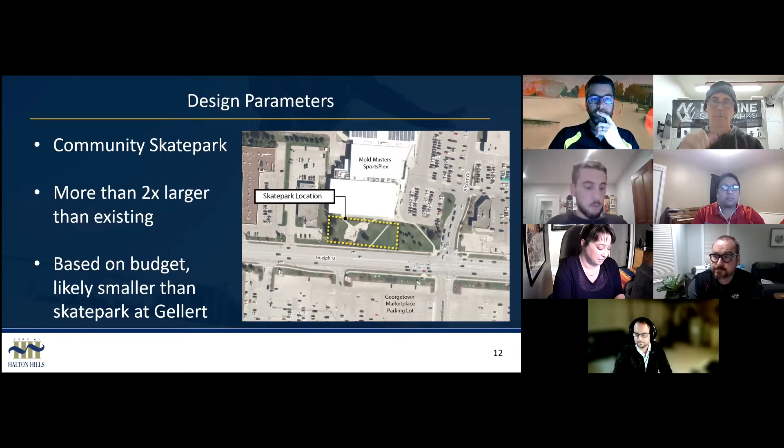So if we jump right in from there into the options, we'll be able to explain these a little bit further. The first thing you'll notice as we go through this presentation is that all three options take on very different forms and offer different terrain features.

We really wanted to use this meeting as an opportunity to spark discussion, and have you provide feedback on all of these design directions so that we can really dial it in and come up with the best option for your next skate park. With this first option, we're considering this our flow bowl street plaza option. This option is a pretty good 50-50 split of those two terrain types.

So if we start with A, and if we go to the next slide where we have our visual aids, our inspiration and precedent, we can talk about it through this. If we look at A, we have that represented as a shade structure. We understand that these facilities are pretty active and tiring—it's a tiring sport—so having an opportunity for seating and shade is obviously quite important. But the main purpose is obviously the terrain for us.

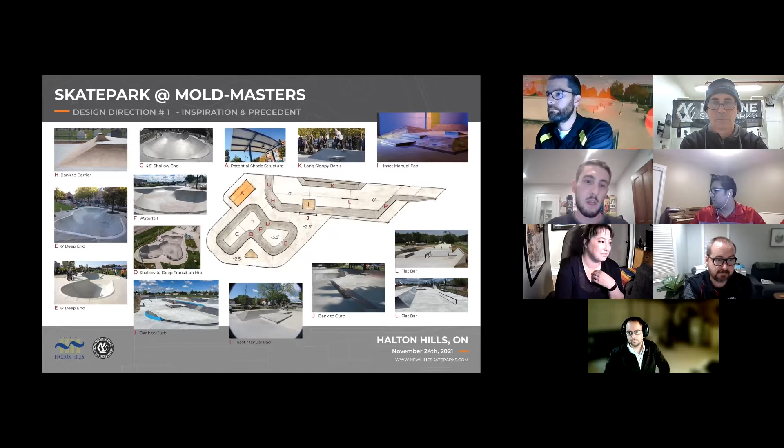C is representing the shallow end of the bowl, which is a back and forth mini ramp, which then feeds you into the hips represented by D. Those are high-low hips from shallow to deep—one's a 90 hip, one's a 45 hip, offering different feels on both hips.

From there, F is a waterfall that brings you from the shallow end to the deep end. Our deep end, 6 feet deep, represented by E, is basically just a double pocketed deep end with a large radius wall that you would be able to stall or launch off of coming down from the waterfall. From there, we move into the street portion of the design.

So in this option, we are able to create a consistent bank profile that runs along the entire length of the facility. That allowed us to build that grade up for the bowl and really maximize the depth of that bowl feature. Along the entire southern edge of the street course, we have a 2.5 foot tall bank. G wraps around, continuing that bank profile, and M blends into a transition profile.

That offers that little bit of difference between bank profile and transition profile, so that you can get a sense of rolling over coping as well as just rolling down a bank.

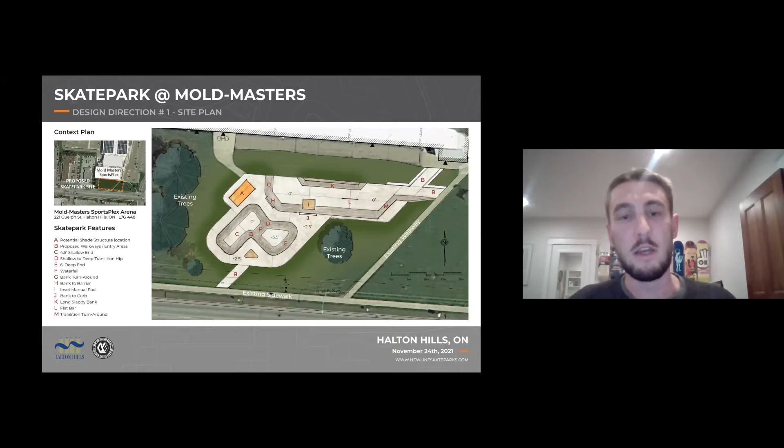So this option gives us everything that you would need as far as basic street elements. You've got your flat ledge, your flat bar, your manual pad, bank to curb, bank to barrier, and a long slappy bank. So that's option one, our flow bowl street option.

This is option two. Again, different form. I see a fish when I look at this option, but this is our more expansive flow bowl option, where we've prioritized the bowl terrain and we've deprioritized the street terrain.

In this option, you'll notice that we have grades varying from 0 to 0.5 on the main deck slab around the bowl. With that, it allows full accessibility around the entire design, and just clean riding throughout.

What a compromise to that is it does restrict the depth that we have for the bowl. So in this option, we relied upon extensions to build up that depth. The main portions of this bowl are 4 feet deep, with 2 foot tall extensions building up to that 6 foot height.

So in both of these first two options, we're really hoping to get that 4 to 6 foot depth range, just as a complement to what currently exists in Gellert and in Acton, where we have the pool bowl, the mini bowl, and then the Acton flow bowl.

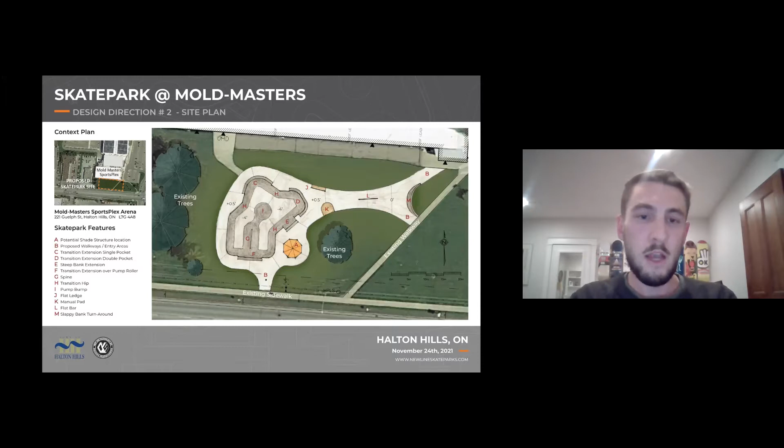So with this option, if we look at the bowl specifically, it's pretty expansive, lots of options, multiple hips, multiple pockets. If we start at the bottom, we have an extension over a roller. I guess if we want to look at the next sheet, that might help to visualize some of these features.

F is represented throughout this board. I think primarily we've identified it - it can be seen in that photo on the bottom left, as well as the photo at the top left.

So basically an extension with a roller bump that breaks the grade, and then that feeds into G, which is a spine. With that spine moving around into I, we have the spine blend down into a half pump bump, and then a pump roller feeding into a full pump bump that's within the middle of the bowl, offering tons of potential redirection opportunities, flow opportunities, speed generators, speed controllers, all throughout that feature set.

From there, we have H, which represents our 3 hips, all of which are at the same elevation, but all offering slightly different angles. Some slightly mellower than others, offering that progression.

Moving from that, we have feature C, which is our single pocket transition extension. That then feeds into D, which is our transition extension double pocket. So again, building that up, allowing for that height to exist not only in 1 pocket, but 2. You'll be able to stay high through those pockets before feeding you into the hips.

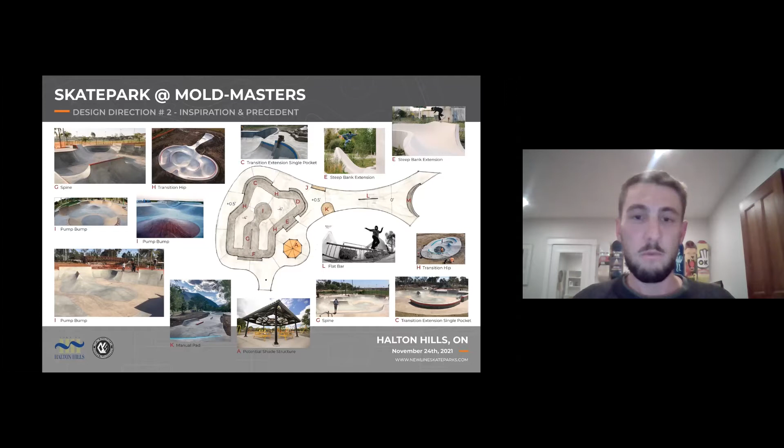I was going to say, Stefan, there could be a roll-in opportunity between D and E. Possible. Yeah, certainly. Yeah, so that's option 2.

I guess we'll move into option 3. So again, different form, slight departure from our previous 2 options. This is one option that doesn't include an enclosed bowl. Instead, it includes a spined mini ramp. So this is our obstacle street mini ramp option, basically.

So first option was 50-50 split flow bowl street. Second option, expansive flow bowl, simple street course, 80-20. This is our obstacle street mini ramp spine option. I would probably go 60-40 obstacle terrain and transition mini ramp terrain.

So with this option, we really wanted to create that V shape, really utilize the space that we had, create that length required to get those multiple hit features on the obstacle street side of the park. So I guess in this option, we'll start with that, and then we'll move to the mini ramp.

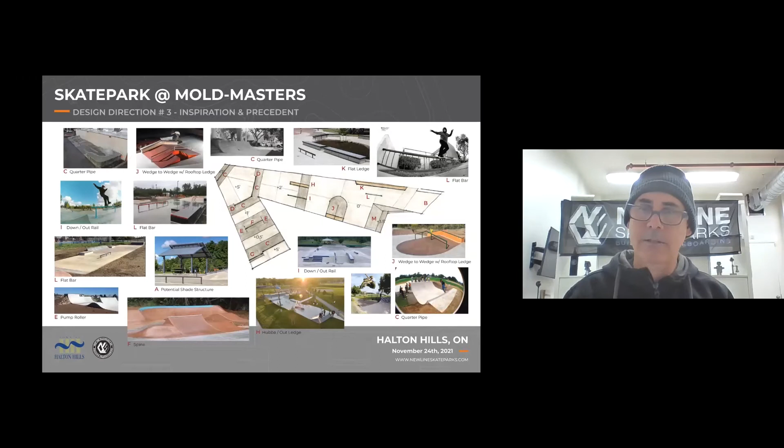I don't know if, I guess Mark, we'll stay, sorry. Mark, if you flip to the next slide, there's a good photograph of what that whole complex looks like. Yeah, for sure. Yeah, so that's represented by photo E on the bottom left there.

Pretty similar feature there, and then also the spine in image F at the bottom as well. But yeah, this option is a slightly different idea.

It draws upon that obstacle street terrain idea, an open transition space versus an enclosed bowl. Going back to the top screen, I want to touch on that third entry. We have the two entries on the top right, but in this option, because of the nature of the mini ramp, we have a pretty interesting opportunity to enter the space.

Coming off of Guelph Street, you're returned back, and then you have two approaches into the park. That was kind of where we envisioned, if we were to put a shade structure, that would be a good location for it, down at that lowest elevation, looking into that mini ramp spine feature.

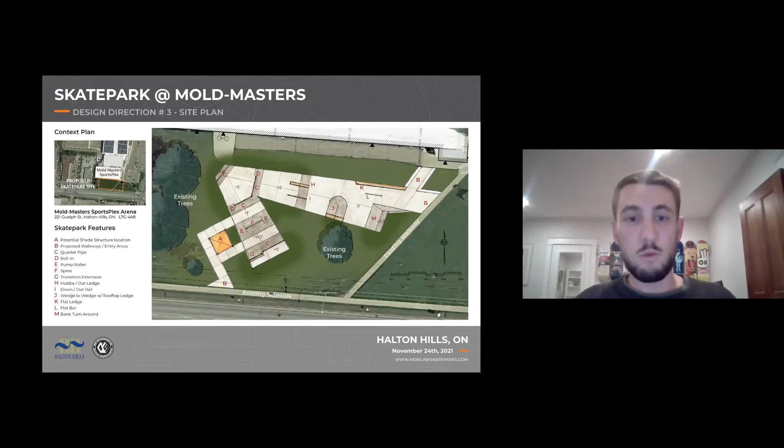If we go to the next slide, it'll give an opportunity to get a sense of some of these features, a pretty good representation of them. A lot of obstacle street terrain features you'll likely be familiar with from Gellert and Acton. They're great for generating speed and for learning different tricks on, and they're represented well by those support images here. Just a different feel, different style terrain.

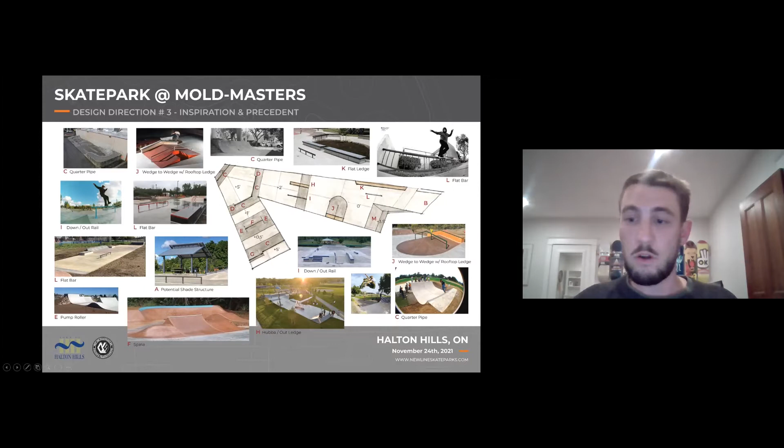We really want to spark that discussion, so we wanted to provide three different options, three different forms, really get a sense of where all of your heads are at and what you want to see in this next park. And with that, I think we're in a good place to move into the breakout rooms.

If the schedule and agenda allows. Yeah, no, thank you very much, Stefan.

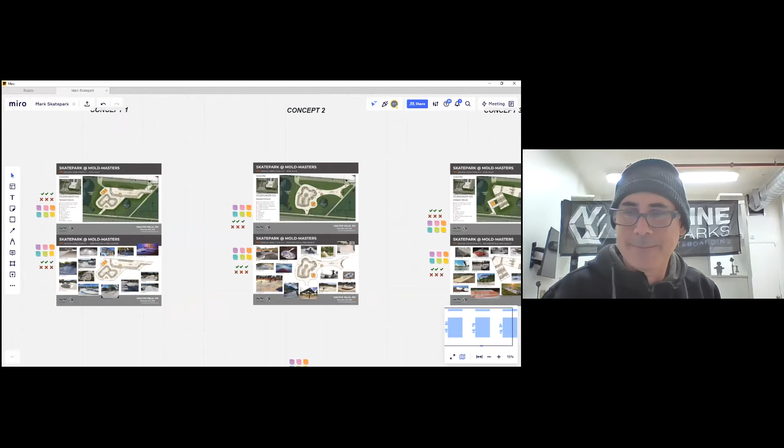Okay, hi Bill, I'll say hello. Oh, there's Justin, okay good. Sorry, my name's Justin, I live in Erin. This is looking pretty sweet, I'm enjoying it. Awesome, welcome Justin. Myself and Mark, hey Bill, okay. It's Warren. Oh hi Warren, there's a familiar face, a face from the past. How are you? Well thanks. Welcome to the breakout room. Good to see you, Mayor Bonnette. I can see, or I guess Meg was facilitating, but maybe she jumped somewhere else.

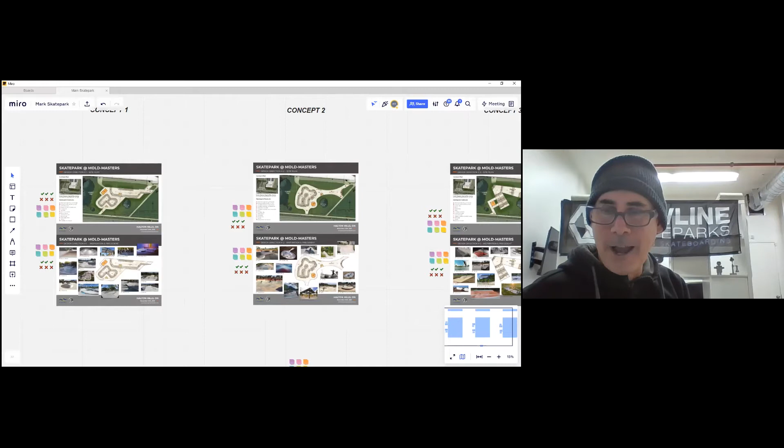So Justin, I'm going to assume you are a quote unquote active park user. Are you a skateboarder and or BMX rider and or scooter rider, or any of the above? Yeah, I'm a skateboarder, but just so you know, there's probably like 20 people in here. Just because you said you couldn't see, there's 15 people in here, or I think there's 17. I had trouble unmuting myself, Mayor Bonnette. So again, welcome everybody in this chat room, but I see participants are 17.

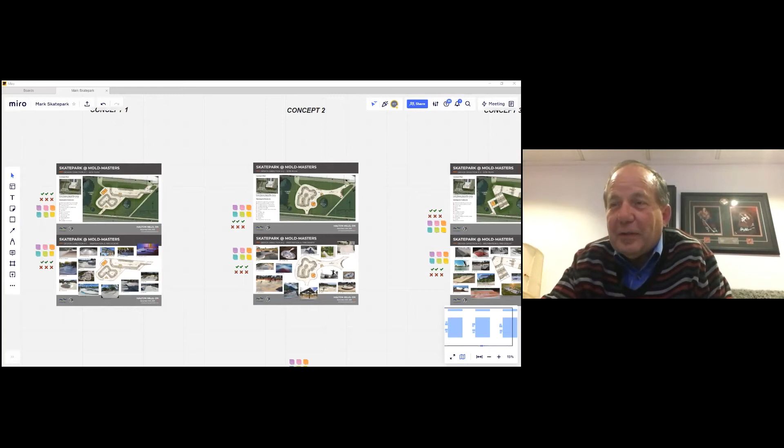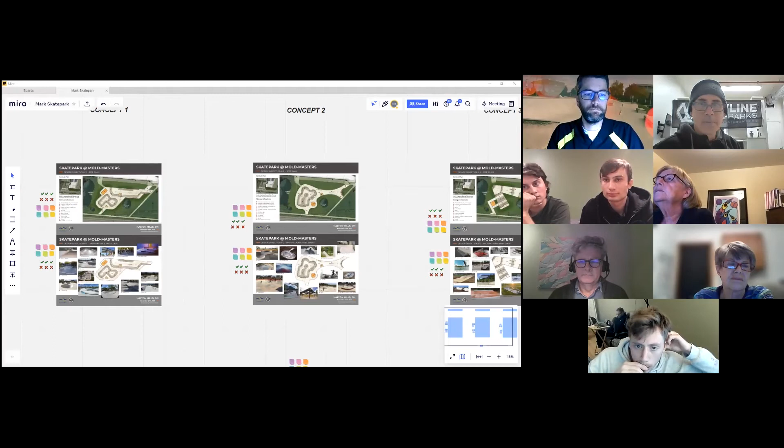Well, I don't want people to be shy. I'm going to ask some questions and I'm hoping to get some answers. The whole point was to spur some discussion. I'd like to spend another couple minutes looking at each concept individually. If you guys have any questions about what you're seeing or the design intent, please feel free to ask. But my questions are really basic and simple. I want to spend a few dedicated minutes looking at each option individually, and I want to know what you see that you like, and just as importantly, what you see that you don't like. We can spend a few minutes discussion on each concept, and then if you guys feel like picking a favorite, you can let us know. If it's easy to pick a least favorite, we can talk about that just as easily.

So let's start discussion on design direction number 1 and see if anybody out there has questions, or let me know something you see that you like or something you see that you don't like.

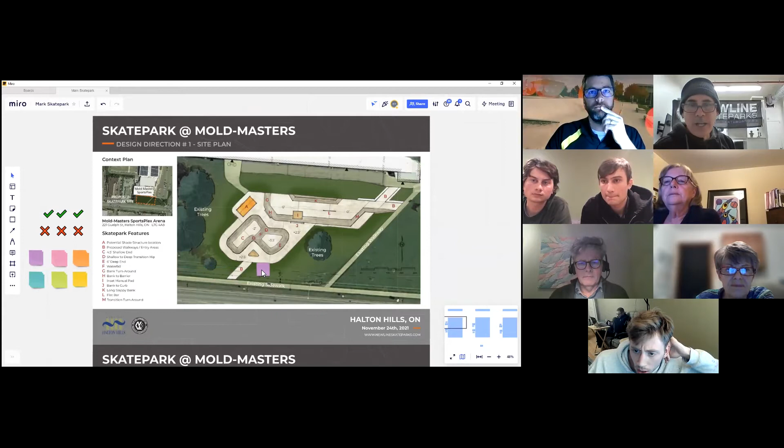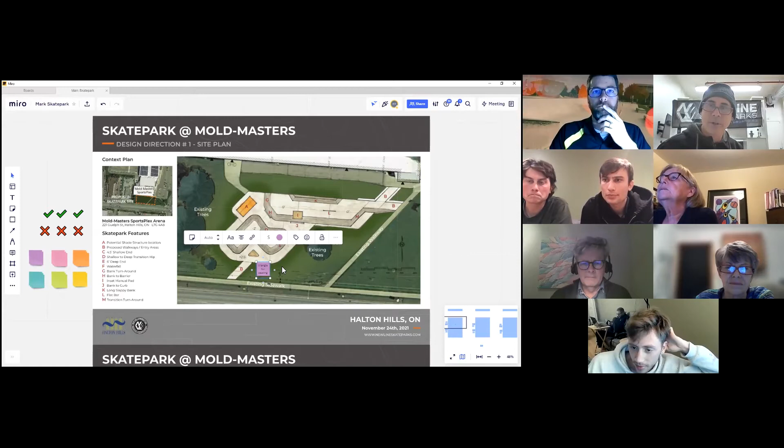Maybe this is a bad question, but at the very bottom, near B, what's that triangle there? We are envisioning that as just basically a seating opportunity, not necessarily a skatable feature, but a place to sit down or put your knapsack or something like that. Like a seating opportunity, that's what we're envisioning.

I think this is a good option. There's a lot of variety for sure.

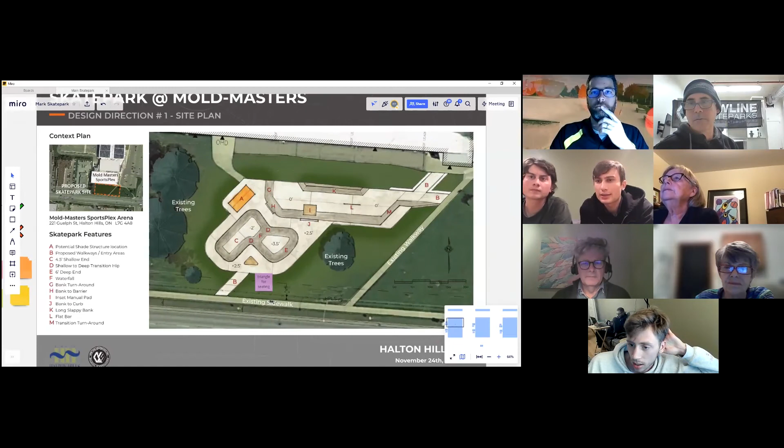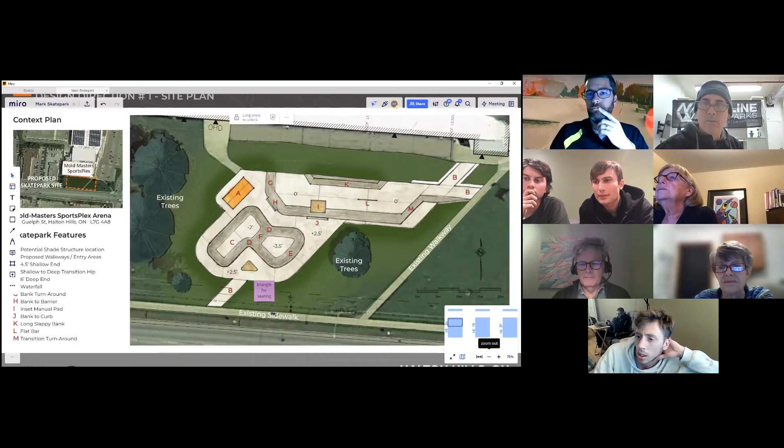This one would rank number 2 on my list. I would say this is like the second best one.

I'm kind of wondering if K, the bank, the long slappy bank, looking at the legend, it's close to 15 meters long. I'm wondering if that's so long it could actually be 2 different things. Yeah, definitely could be 2 smaller pieces instead of 1 super long feature.

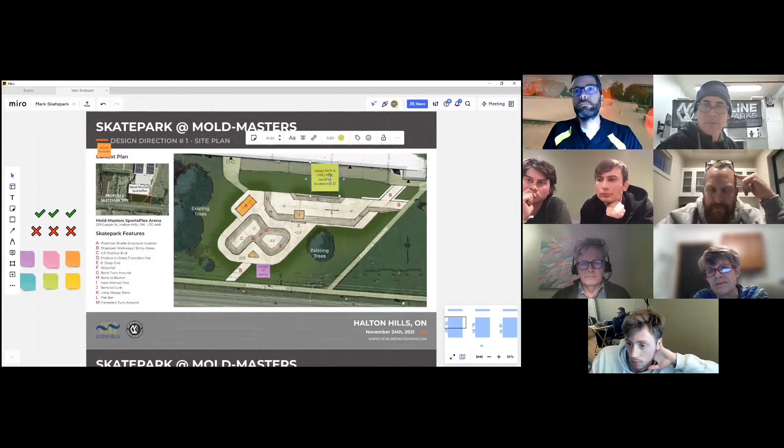Yeah, there's lots of variety you could do with that piece for sure. Something to redirect off on the north end of the park is kind of the main purpose it's serving as it's currently drawn. Or depending on how low or high it is, you could maybe put a bank to ledge, but bring the ends in on either side and make it like an up-gap manny feature across the top of it or something.

I guess the comment is when you really look at all these features, usually we design in with sort of rough intent to some of these things, but there's so many different varieties of manual pads, banks to curbs, banks to ledges, or features that we could put in some of these locations. So any ideas or comments are good ones.

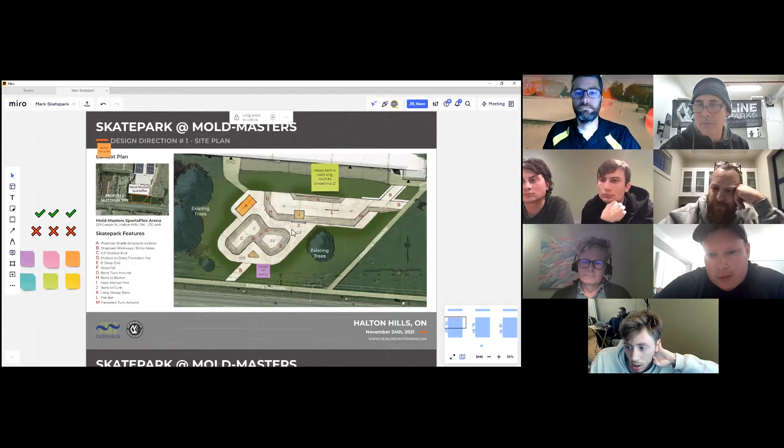Is it fair to say that this layout right here is in a similar footprint to what's currently there, just to get a rough idea of size? Yeah, it actually might be even larger than the current concrete footprint. Slightly larger.

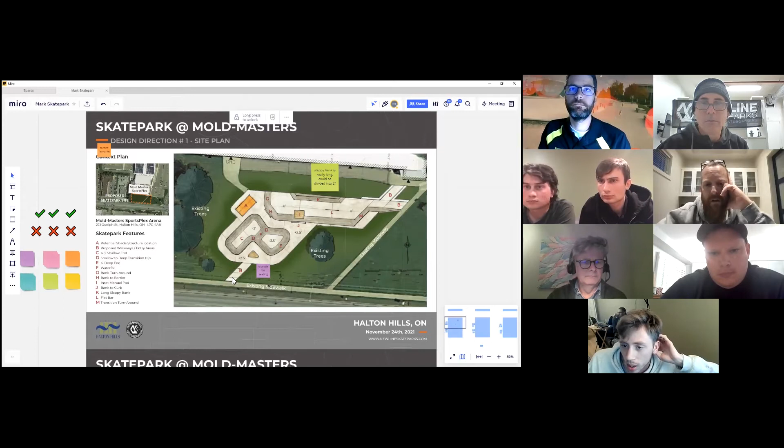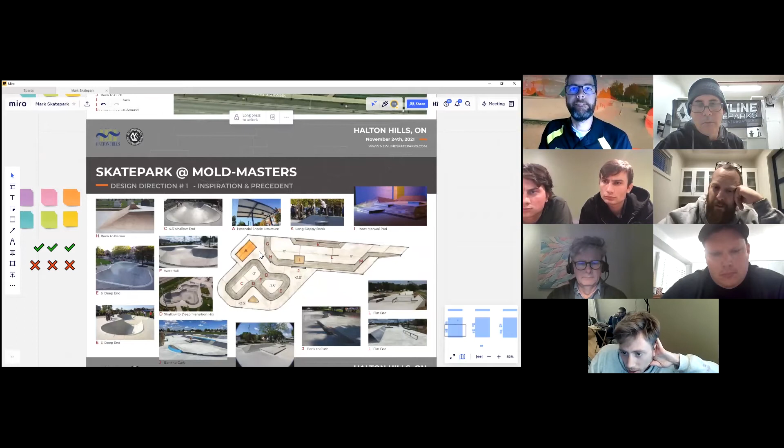I'm wondering also, it's kind of hard to visualize, but the G bank turnaround, I just feel like it's kind of hard to get there with speed, depending on how the end of the K thing works, or how much space there is up there. I'm almost wondering if one of the features you don't have in any of these is a step up, and there would be a wicked opportunity for a step up right there, instead of the bank turnaround. But I don't know if I'm experienced enough with that.

Bill, it's probably safe to say it's more of like a drop-in kind of turn, this particular street area here is probably going to skate and ride a little bit slower, more like hitting manual pads and flat bars, with some turnarounds. Whereas in the other concept, where it's more dropping in, going down a bank, going over a fun box, turning around, that's going to feel more like a street course, where this one might skate or feel more like a plaza.

Yeah, I think there's definitely some pushing involved, especially if you're going right to left and going up that G bank or up that H bank to barrier. There's definitely some pushing, looking at the length of the design, moving right to left.

Which you could change if the comment was that we kind of like the feel and flow of a little more obstacle-y design. If you turn that K into two different pieces, maybe what you put on one side versus the other, one could be a more technical street skating style feature, and the other might be a fun box or a hip or something that can help you generate speed if you were to put an up-gap or something where G is. So that's a great comment.

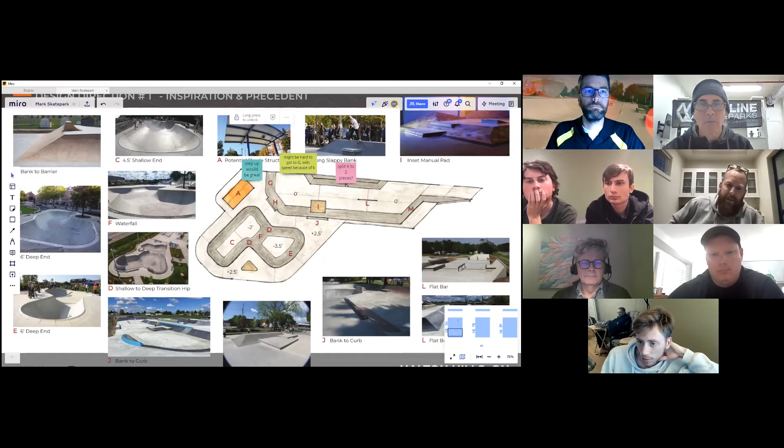If you wanted it to skate more like, you like this option in this bowl, but you wanted the street course to skate more like a street course instead of a technical street skating space or plaza, that's possible too. It just depends on how you mix up the obstacles.

What do you guys think about the bowl in this one? It's kind of a big bowl. Pretty sweet. Yep, 4.5 and 6.

The drainage opportunity on site isn't going to let us go much deeper than that. That's why we're showing it built up 2.5 and then 3.5 down. 6 feet deep is about as deep as we can possibly get, given the drainage opportunity on site. But yeah, what do you guys think of this bowl in this design? I shouldn't say guys, what do you people think?

I think it's a really good option. It's a cool shape, definitely a cool feature. I think the benefit to this bowl over the second park layout is you can imagine there'd only be one person skating in there at a time, so there'd be a bit of a lineup waiting to skate for the second park option. So this kind of spreads things out and there's more variety.

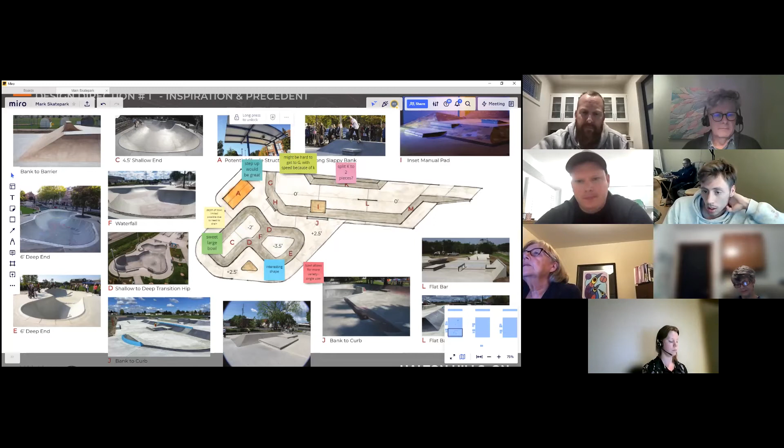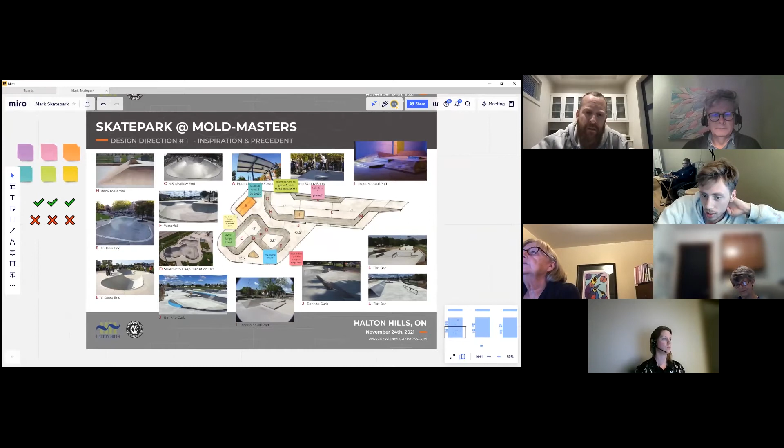I almost want to say that, since the second bowl has so many features in it, and this bowl doesn't have really any features, it's kind of hard to imagine how big it is, but I feel like maybe it's big enough for some feature in there, especially along the northwest section. But just because that's probably like 12 meters across, pretty big, I think. I don't know, that's just an idea.

Any thoughts on features? So you thinking like an extension, or a little set of pool stairs, or any thoughts on little toys or features?

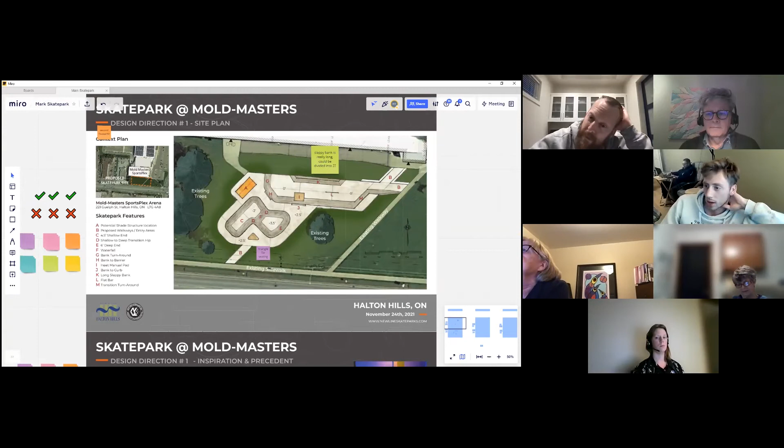How about a length of diamond grind coping on the long back wall? I like the look of the hips in this bowl. That looks cool in this bowl layout.

All right. We can jump around too if you want to move to the other concepts. I want to make sure we at least spend enough time in those other two. We can always come back, but I would hate to get cut short. We only have, is it 15 minutes in the room? Is there a clock ticking on us? Or are we going to get ejected from this room and pulled back into the main room?

Yeah, we're good so far. But yeah, we can move on to the next. We won't be being pulled out of this room. We are technically the unassigned room, so everybody will be being pulled back to us. Okay, gotcha, we're the hub. Exactly. Yeah, great, thank you.

Yeah, curious for some feedback on this design. This is the one that, as Stefan said, really puts the highest priority on the transition terrain and lower priority on the street features. So really curious to see some feedback, what you see that you like, what you see that you don't like, or just sort of overall impression on this design option.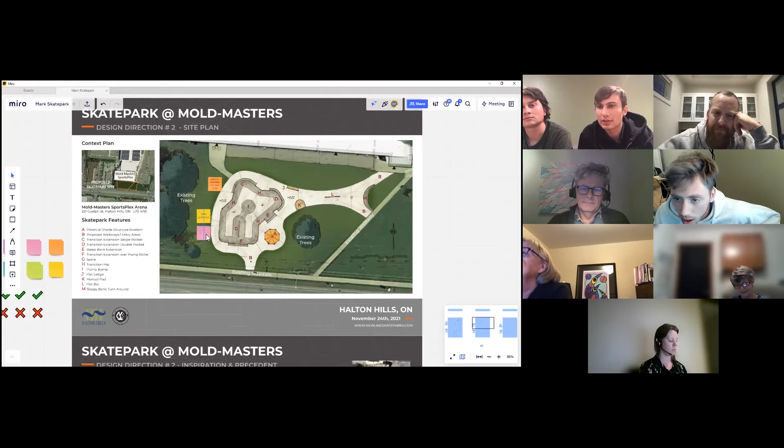The bikers would be stoked with this one. Agree. Yeah, again, what I see as the real downside to this one is that there would be like maximum 2 people skating in there, if that. So it just seems like there would be a bit of a lineup, a bit of too much waiting time just to skate. Yeah, this one could probably handle the least amount of volume at any given time out of the 3 options for sure.

For a crowded, busy day at the park, yeah. The flat rail section is a bit of a bottleneck, where I can imagine people just traveling through there. I would just suggest that to be wider. Yeah, good comment. I'm sure that it's been laid out with at least 8 feet on either side, but you can tell that it's definitely the narrowest point.

So it is compromised by that, but you're right, the thinnest of all features is pretty much a flat rail. And if it fits right in the middle, it's like 8 feet on either side, but you're right, it's really the nature of the design and how it gets skinny through there.

It kind of looks like not a lot of people would go over there though. You'd be hitting the rail, but nobody's gonna want to fly at M, right? Unless, I don't really understand fully what M is there, but it looks kind of like a little manual wall thing.

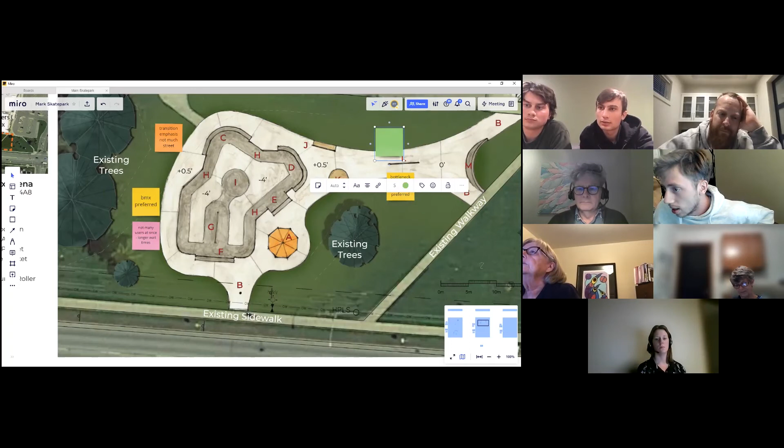Yeah, it would be like likely some kind of transition turnaround. There's kind of the rise up at M and rise down, so it would be highest in the middle and kind of tapering out in height as it goes out to the corners. So you get sort of the peak height of it right in the middle of the curve.

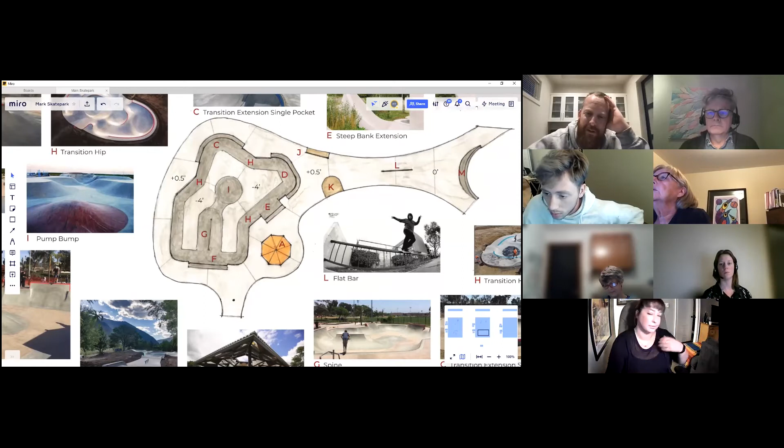It's probably more like a small tight transition that you could almost session on its own, as opposed to something you're getting a ton of speed for, so to speak. Because you're right, there's probably not a lot of high volume, high speed skateboard traffic, but at the same time, it is a place where people are coming in and coming out of the park at the same time.

It almost seems like if it was wider, he'd be asking for something else in there. Like you could almost fit a little more street stuff in there if it was wider. I know that means it's a bit more expensive, but it seems like a lot of flat with just a rail around it that you don't need to fly through. I don't know. It's good feedback.

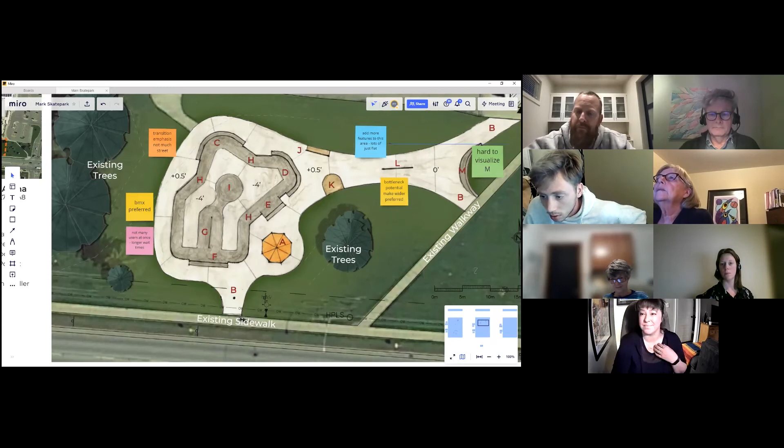Thank you guys very much for building these parks and for taking our advice or our feedback. I just wanted to say that I skateboard at Gellert a few times a week at least. And park number 1 and park number 3, I think, would be better for everybody, just because this park looks fantastic if you're on your own, but everybody knows that there's lots of people at these parks, and I'm not sure if it could handle a lot of people at the same time riding it.

I do agree with that. This would be my least favorite option of the 3.

Yeah, that's great feedback, and thanks for presenting in such a constructive way. No problem, buddy.

It's true, just in terms of capacity and how many skaters or bikers can ride at any given moment. Yeah, you definitely probably wouldn't want a park like this if this was the only park in the community. The reason we brought this option forward is because we know there are some other parks in the community, so it might be a good addition to the network.

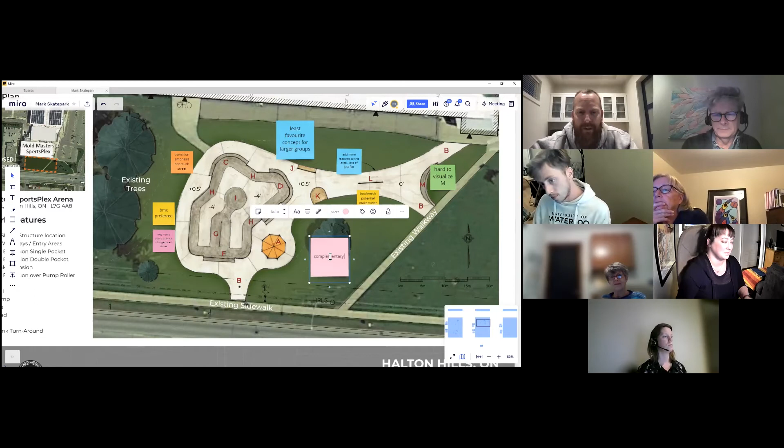But you guys nailed it completely. The total number of skaters at one time is less, and that's why in this one the street area is probably more people playing games of skate, just sessioning a ledge, sessioning a flat bar, nothing too crazy. The street option in this is more like skating at a spot, I guess. And then you've got a pretty expansive bowl unit.

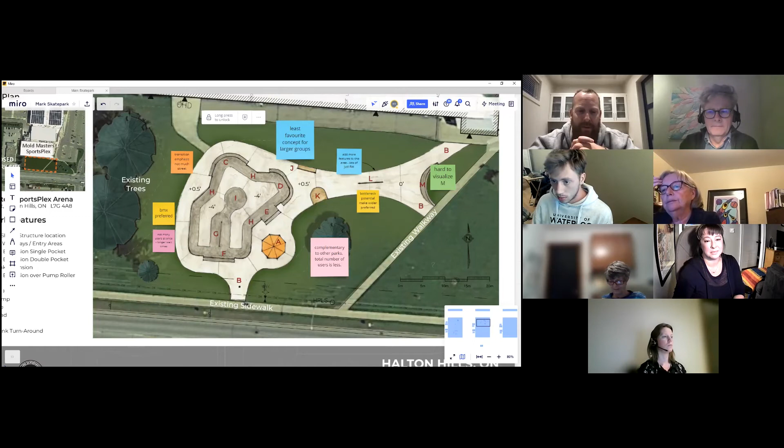Yeah, that makes a lot of sense. And also to complement the other skateboarder, I forgot his name, but he's from Acton, how he said that the spot around the flat bar, I'm not sure if it's in the budget, but if we could maybe expand that space to add more features, because we're already going through the budget, the permits, the construction, make it just a tiny bit bigger, since we can't get rid of the trees.

Like the Gellert Park is fantastic, it's huge. The Acton Park is fantastic, it's huge. This one is really, really nice. But if we're already going through all the work and all the money, then if it's possible just to make it bigger, because Georgetown is growing, the surrounding areas are growing, population increases, more people are going to be using this park. So that's just kind of my thoughts.

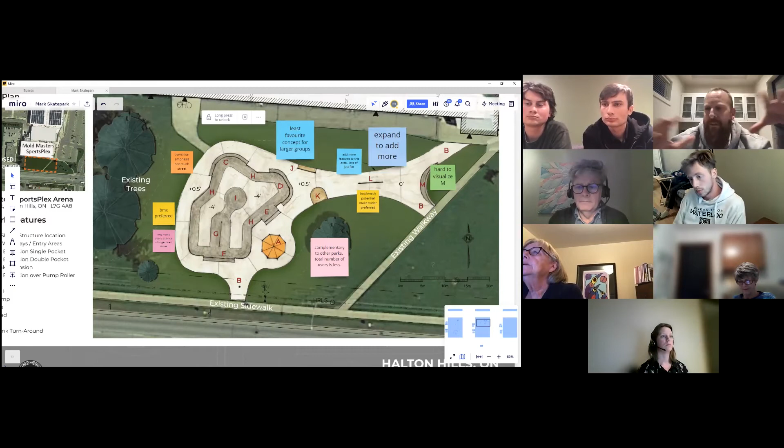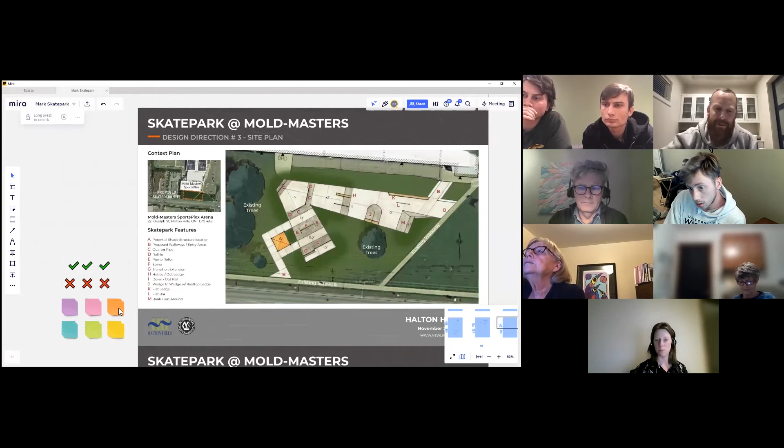Yeah, I wonder, Bill, if it makes sense to just move to option number... if everyone's naturally gravitating towards option 1 and 3, maybe take a look at 3 and not spend a ton of time. Because really the difference between 1 and 3 in a nutshell is: do you want a self-contained bowl, or do you like a mini ramp with a spine sort of option? Because you've got other bowls in the community. So maybe if we focus a little more on comparing 1 versus 3 and not spending too much time on 2, if everyone's naturally gravitating towards the bread instead of the meat of the sandwich, I guess.

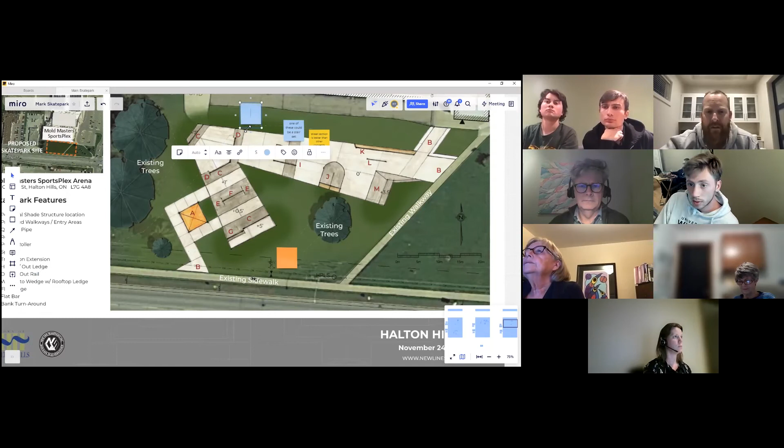Yeah, and it's a fair point, because usually when we're at this sort of design direction phase, the next phase we'll get more into design, and so less is more usually, because it's always easier to add things than to crowd it and take things away. But those are great comments. Easy to switch it up between I and H, mix up what that drop interface looks like and what those features look like, and maybe add 1 or 2 more things, or an up gap or something, for sure.

Yeah, somebody earlier mentioned a step up, and I could see that fitting into this design quite easily.

What are your guys' thoughts on the mini ramp, spine ramp versus a bowl? My opinion, this is the best option. It's really like the best of both worlds here.

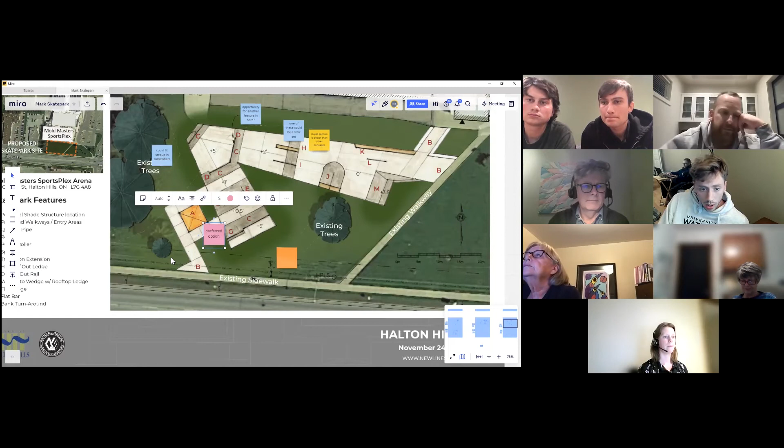Is that shared with others as your preferred option? Definitely trying to. Could you slide over a bit so I can see the legend on the left again? Yep. Which one are you questioning? You can see it now, fine.

Sorry, I missed that last part about the preferred option. Are we talking about the whole skate park as the preferred option? Because if that's what we're talking about, then it definitely is mine, but I don't know if I speak for anybody else.

Yeah, I definitely gravitate more towards this third option. With Acton Skate Park so close and Gellert having lots of bowl features, it's nice to see some more transition features. The only thing I see in this design is that at the peak where the C is, at the 7-foot mark, it could be a little congested depending on the size.

Just in transitioning from one line of the skate park to the next, but otherwise it looks good. Yeah, that's a good point, Corey, because that's where a lot of people will be standing and starting and transitioning back and forth. So sometimes having no feature there might be just as good if you have a bunch of people standing there.

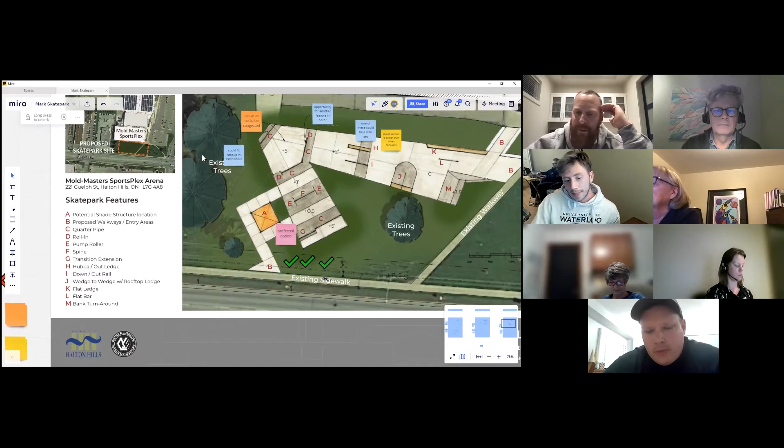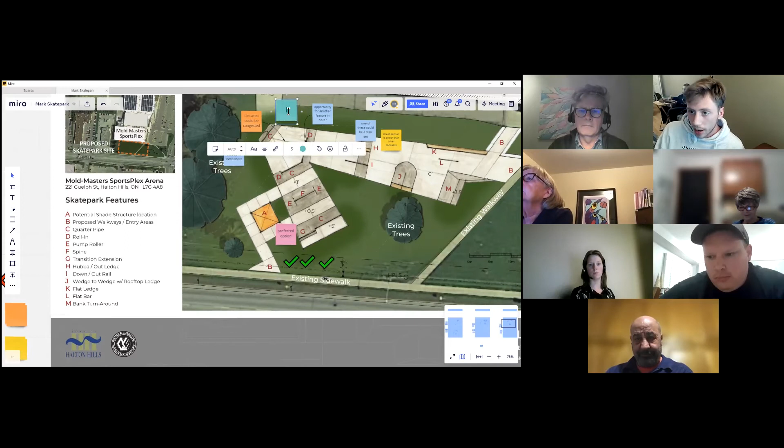Yeah, I was just gonna say, like a 2-foot quarter, I don't know how to use it there, but maybe if it was rotated onto the other side of it instead of at the end, I don't know.

And just like the way it steps down in the street part, I almost wonder if the street part on the far right extended through there, and some different things happened with where the C, D, and H and I are, because it looks like the far right section would be really sweet. I just don't know about the J right next to the ramp. The J is sweet, but the ramp with the I and the H is kind of weird.

Are you talking about the features themselves, the spacing, the angles, or what do you mean? Like the 2-foot ramp, it's hard to do anything on a 2-foot ramp. The hubba and the stairs are wicked, but I guess I'm just coming back to it should be stairs, I guess. I don't know, just 2-foot ramp all the way across, I don't know if that'll really be used.

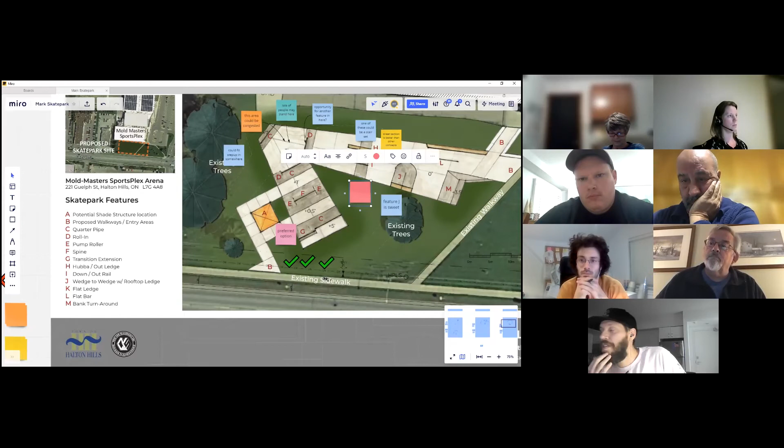Well, the ramp is kind of set up so you can hit the flat rail on top of that space. Yeah, so if you turn one of those to stairs, that eliminates the front side and back side option on that section. I do like the idea of adding stairs though.

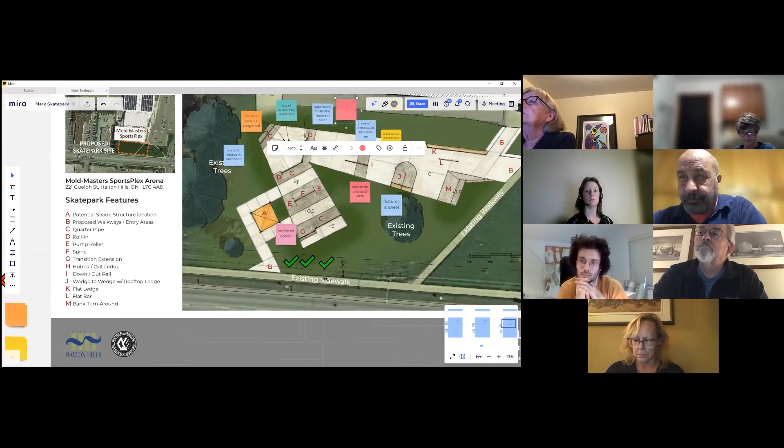It would be pretty small, but if you added it just to the next level up where there's the C and the D. Yeah, at least that adds it in there. Yeah, it would take away from some of the lines if we add stairs, but we could maybe find an ideal spot.

And then you could get like a double drop in a row where you do a trick down the first drop and then a trick down the hubba or the rail. So maybe on the outside, like you said, where D is, but also on the I-H line there, maybe on the outside there could be almost like a mini Carlsbad gap or a grass gap on the outside, so that you could gap over and gap down.

If you look closely, there is a secret gap between the stair spine mini and the elevated 2-foot where they meet, that grass gap in between. Where's that? Sorry, so I can draw it. He's talking about between the 2-foot and the 1-foot on either side of C. Yeah, if you ollied off the deck where it says +2 and landed on the flat bottom where it says +1, there's like a secret grass gap in there. Got that? Right, gotcha. Yeah.

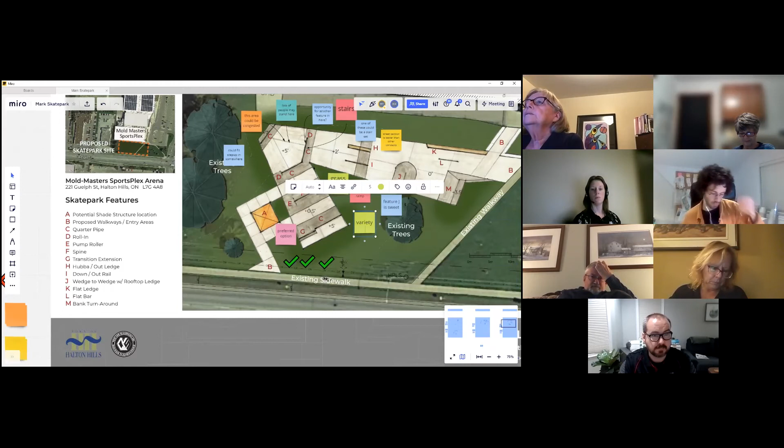I think the bottom half of the street course would skate almost like a mini street league course - you drop in, go down something, go over something, turn around, come back, go over something, come back up, and keep going back and forth hitting stuff along the way. Whereas the top of that line is more technical - that's your flat bar, your flat ledge, a lot more longer space. They work together quite well depending on how exactly we detail it.

I have one question from B to B, from the existing sidewalk to the existing walkway there, around that existing tree - is there any way maybe you could put in like a pump track or something? I don't know, something along those lines, if that's even an option, just to add something.

Definitely something we talked about. It's probably going to be a budget constraint more than anything else, but that makes sense - you need to have something where you kind of float out of the mini ramp and could hit a couple bumps and corners around there and come back into the street course for sure. Yeah, even like from M to the B.

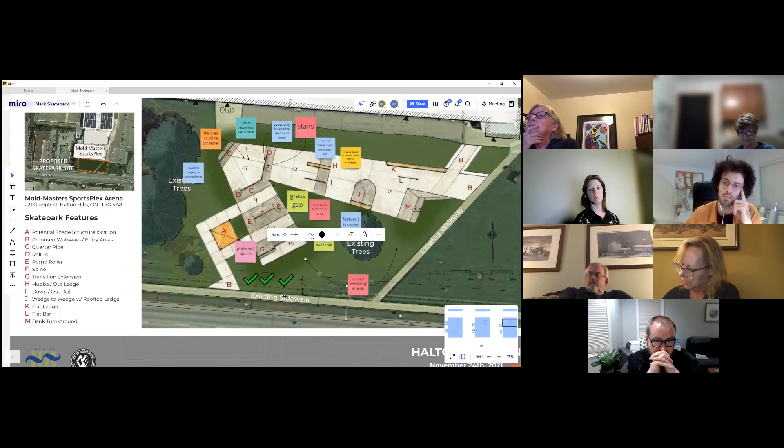Great comment. One thing that comes up a lot at the Gellert, we play a lot of games of skate, and you can't really play anywhere without being in the way of a certain obstacle. If that B and B section, if the grass in between was just flat ground as well, that kind of designates a little game of skate area, a little flat ground. Yes, that makes a lot of sense.

Yeah, that's a sweet idea.

I've noticed option 3 is getting most of the love - is that the preferred concept so far? For sure, yes. At least four people have endorsed that notion. Nice, I'll add another check mark. Just as the old guy in the room, I like this park, and I can see why everybody picked it. But I'm looking for a slappy curb.

So they were talking about that flat ground area - I don't know if we can add a slappy curb. A lot of people that I skate with are always looking for a slappy curb, so if we can add one somewhere, that'd be great. I don't want to get in all the young kids' way because I can't ollie on those ledges anymore. Maybe just next to K. Yeah, we could definitely look at shortening K and adding a slappy curb on that edge.

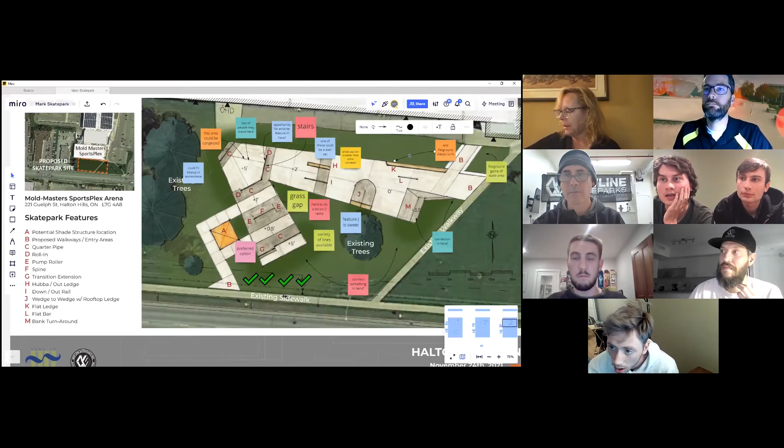So, Councillor Farrow-Reed, you have your hand up. I do. Thanks, Mark.

I know we're talking about this design, but can I ask a general question? How many participants can use each design at once? What would be the maximum amount of people that could use this design?

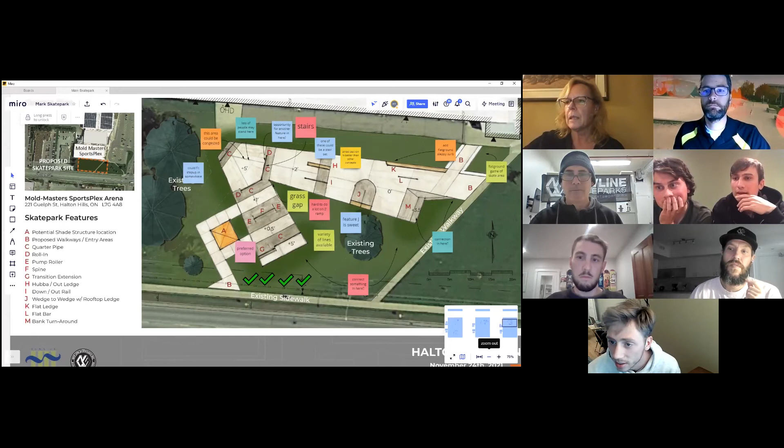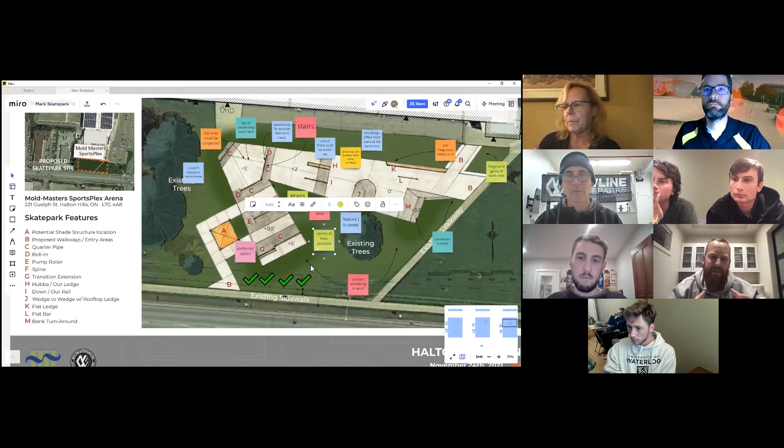Probably like 8 is my guess. I believe this design optimizes how many people can skate at the same time compared to the other designs. Sometimes it's hard to break down an exact number because this is probably the most sort of lines that could work together and people skating at one time. But usually most people's runs might be 45 seconds, a minute, or you might just be working on one trick. So it's probably best to compare the 3 together in terms of which ones could handle the most volume of people riding at once, which gives an indication of peak times and which one's going to be the most comfortable. This is probably the most, followed by number 1 being the second, and number 2 by far being the third.

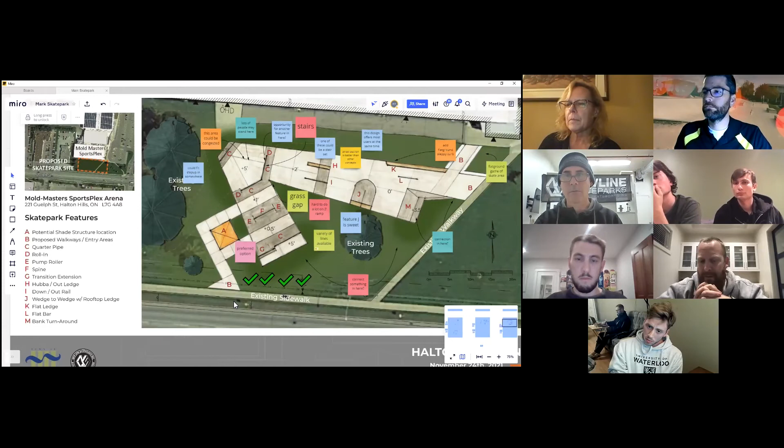Can I just get a sense of what's underneath A? Is that also like a flat spot with a post in the middle and then a 4-meter gap of grass into where the bump is? Because maybe that could be shortened and then just be like another little cool gap or something, just because that spot, I don't know how to use that.

You know what's interesting is this area was never specifically designed or intended as a skatable area. We were trying to create three unique looking options and find a place for a shade structure within each. Arguably the shade structure is a little more integrated in the first and second design options, but in this one, looking at the different levels you could interface with the skate park, and the mini ramp complex with its spine at two different levels, it made sense to create it as a bit of a broken off area, mostly just a shade structure and some benches, not necessarily skatable terrain, broken off from the terrain probably more so than in the other options.

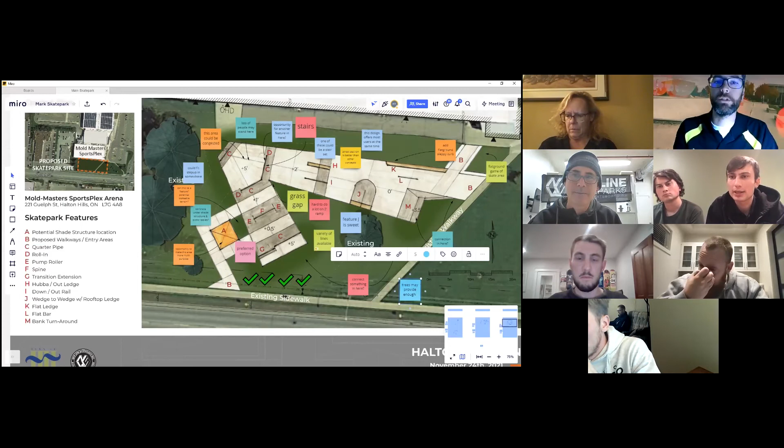That is an interesting point. There's some very mature pine or spruce, Mark, on the site - spruce, I think. And there's that grassy knoll, which is a nice natural spectator area and shaded area. Which is also a good point.

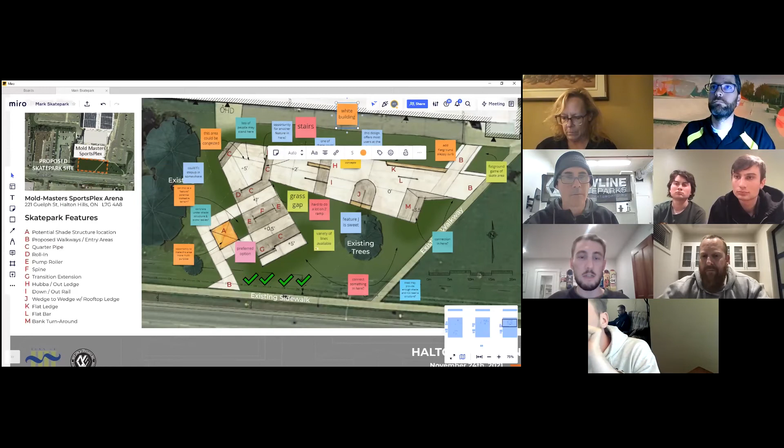One thing that came up in our breakout room was the fact that it's next to the building. The building's white, so it's actually likely going to create a bit more of a heat island than a normal site would. A shade structure might be more warranted here, just because in addition to those trees, we're also on a southern frontage, so shade is probably going to be in higher demand, and might not just be accommodated by the existing trees on site. There was also talk of a landscape buffer between the building and the park to help collect water and ease the reflective nature of the building.

So Mark, how do we want to go from here? Do we want to do the summary statement on each of the breakout rooms - is that what we're doing next in the agenda? Well, yeah, sorry, we just had a couple minutes left in the breakout room, so whenever you guys are ready to move on to that next part, feel free. No one's come back in anymore - we've gathered everybody together.

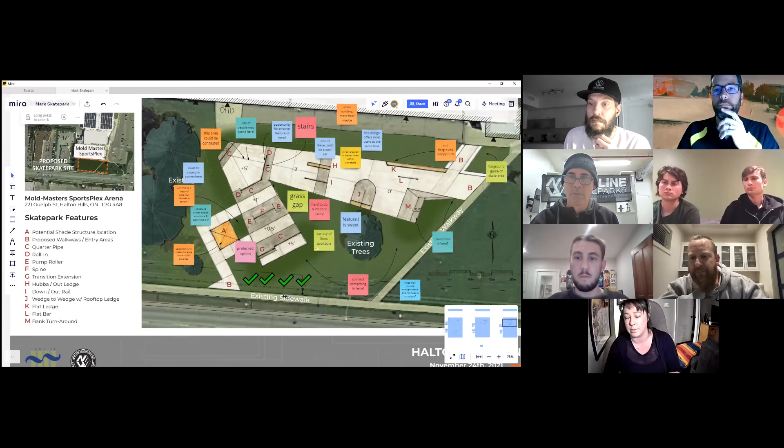Excellent. I guess if anyone has any other comments on any of the locations, we'd certainly like to try and capture those now.

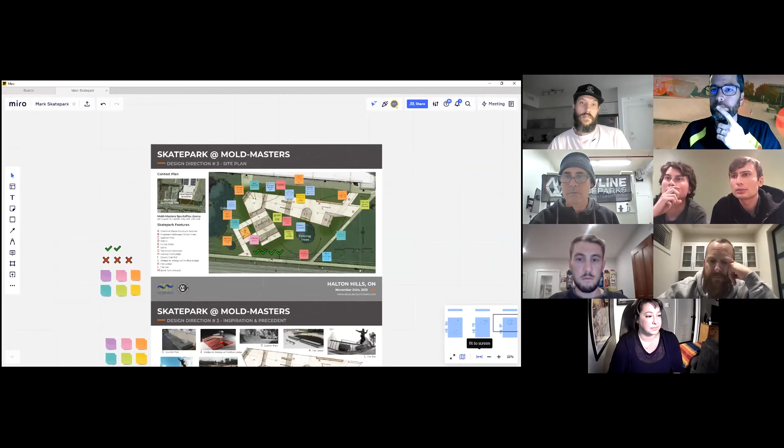The one thing I would add on this design for the M feature - I'm not sure how large the standing area there is, but I'd suggest making it wide enough so you can still skate into the bank and do tricks into it, and also because I can imagine people standing up there waiting to take their run. That's definitely what happens at Gellert, where that and the opposite side, as already mentioned, get congested pretty easily. But especially for this one, it would be cool to have a little bit of run up to be able to skate into the bank.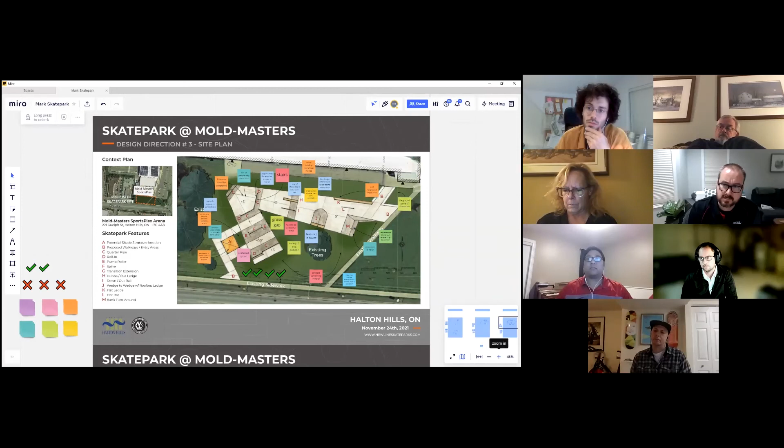That's a great comment. Did any of the other two breakout rooms have any clear winners in terms of the three designs that everyone in the room was gravitating towards?

Our breakout room was leaning towards 1 and 3, but we're waiting for the Georgetown Youth Center feedback. They were contributing on their own, so we're waiting to see their post-it boards come through. Earlier they had some youth in, and they were leaning towards 1 and 3 as their preferred options. They told us about 55 youth had come through tonight at varying times, and about 20 of them were skateboarders or users who would use the park. So they have a whole pile of information they're going to pass on to us. We didn't go through every post-it that had been posted.

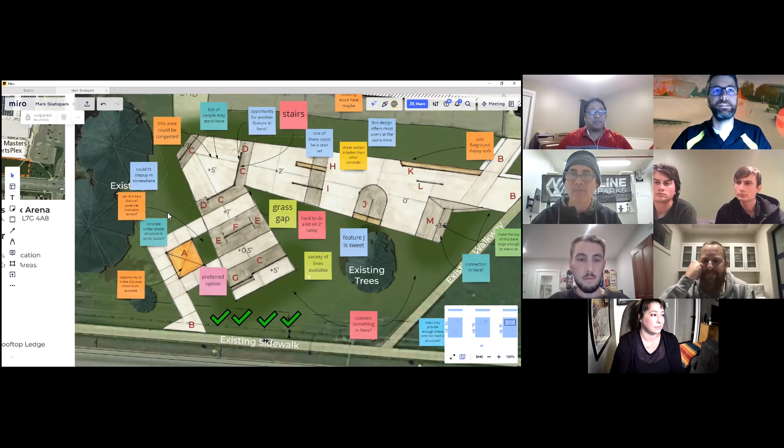It's really great to get so much interest and feedback.

I'm guessing this option is probably, in terms of budget, the highest. All designs should be considered equal from a budget standpoint. Oh really? Okay, well that's good.

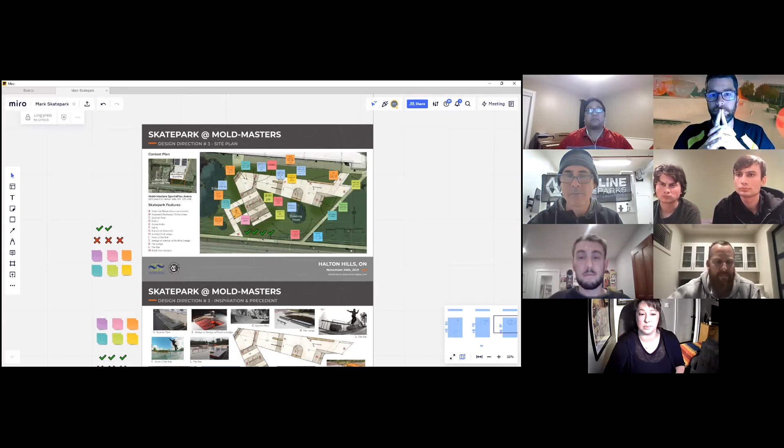I was just thinking, what would you sacrifice? Obviously everybody likes the park, but if it came in over budget with the city, how could we get the street portion that everybody seems to like and sacrifice on that spine? Do we just eliminate the spine and bring, I can't really see them on my phone, C and G into the spine location? Because it sounds like everybody wants the street section, and there hasn't been too much talk about the spine.

But I think with just a standard mini with the extension, people would be happy with it if you had to sacrifice something.

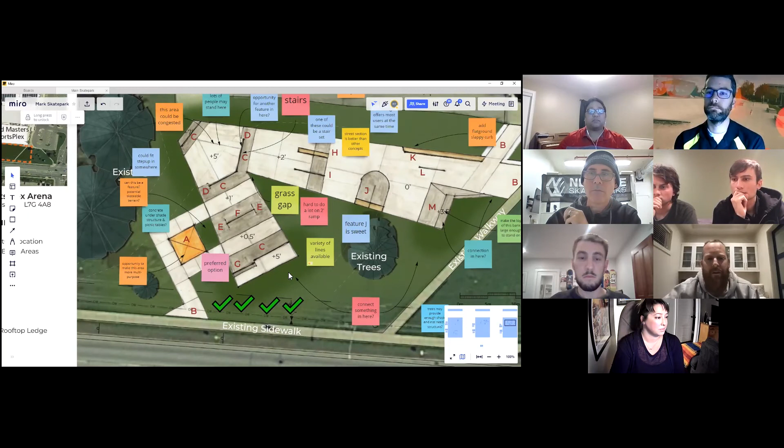Yeah, echoing Bill's comments there, the beauty is that this is a design build contract, similar to some of the other projects we've done in the community. So we're showing concepts that we're pretty comfortable we're going to be able to build. I don't think we have to make major sacrifices — it might just be decisions over details and little features. But as Bill alluded to, we're pretty confident we're showing 3 concepts that could get built, regardless of which ones you guys pick.

I think to that point, if the priority from this discussion was primarily on street, we could add to the street course in favor of eliminating the spine. If that's not a priority, there's that opportunity as well. We're losing something, but we're gaining it somewhere else, because they're all coming in on budget, or for the same budget.

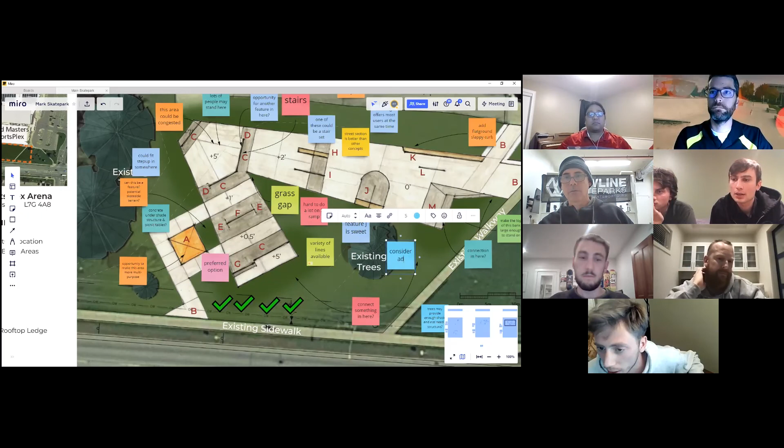I don't know if this was mentioned, but can you give me a sense of how tall the spine is? It would likely be similar to the transition profiles on either side, so 4 feet, probably to match. The spine itself would be 4 feet, and then the pump rollers would probably be 2.

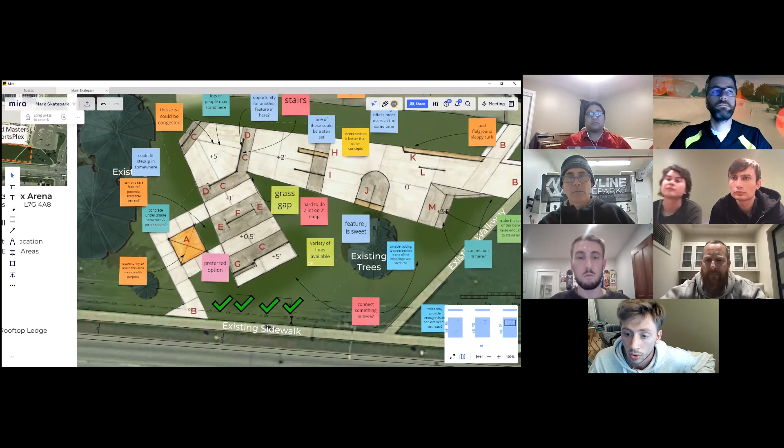Yeah, the way we have it designed is that one side of the flat is slightly lower than the other. So it'd be like 4 foot on one side, 4.5 on the other side, and then an extension and some lower pump bumps beside the spine.

Hey Justin, I think we missed what you said, you were muted — if you want to repeat. I was just asking how tall the spine is. Yeah, I saw you talking after Stefan's answer, so I was just wondering if we missed something.

Is it 3.5 on the other side, or would it be 4.5? 4.5. Cool.

That would definitely be — I don't like it, that's pretty advanced. 4.5 feet spine sounds pretty hard. I think it might be similar to Waterdown, if you've ever been there.

That's probably the beauty too, if you wanted the height of the spine at Gellert. If you wanted to skate more like a mini ramp, you could easily just raise the flat bottoms up a bit, and it could be 3.5 and 4, or it could be more advanced — that just depends on how we detail it, if you want it to skate a lot more like just a super fun little mini ramp.

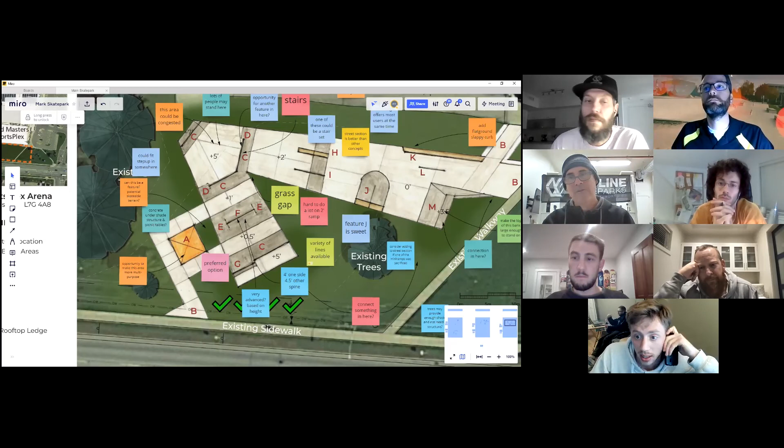We could even think about reorienting the long edge in the direction of the skate traffic as well. Put the coping along two edges and change the direction of movement through the mini ramp if it wasn't spined. Play with that.

As a random idea, possibly if the spine was not all the way across - I'm not really experienced with using a spine, to be honest - but if there was something else in the middle that you would get hit from going down the one quarter and then hit across to the other quarter, like a gap, or maybe even a rainbow rail would be the coolest thing ever, but I don't know.

What we're currently showing there is F as the spine in the middle, and then E on either side are like roller bumps that would easily let you pass through without having to navigate the spine.

Maybe a little, I like that idea though. Maybe if one was a little wider than the other one, you had a little ride-on slappy curb that went over top of it, or ride-on, like you said, a little rail or something, just to mix it up.

We'd have to look at the width that we have. I think we're probably looking at 12 feet right now, so we could shorten that up.

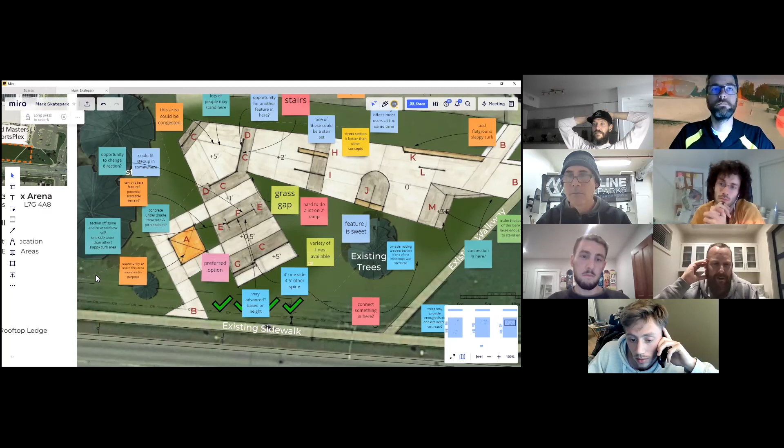I don't know if you guys follow much of what's going on in Vancouver these days, but the coalition just put on their All Aboard event, and they put one on, I guess it was 2 years ago now, and they got it's called the Green Ramp. It's just a little mini ramp spine that was built a few years ago, and it gets moved around to different events. If you get a chance to check that out on Instagram or see footage, it's been very well used and loved by everybody. I think that one's about 3.5 feet tall - a little 3.5 foot tall spine with rollers and a little extension, and it's getting a lot of love right now.

Speaking of a lot of love, I find it interesting that most of the discussion seems to be centered around this design direction.

Yeah, I think - well, safe to say that a number of the people providing feedback said that this was their favorite. Cool.

So yeah, I guess any more comments at all from anybody on any of the concepts right now? And then if not, we can kind of move into the next portion of our discussion.

Just as another idea, where I and H are, could we compress that just a bit? Because I'm imagining a lot of space between each of those. And then maybe that would give you space for stairs or a step up on the other side of it. But I keep forgetting it's only 2 feet up. But stairs 2 feet up could be nice if you shifted both of those down a little bit and then put stairs over past H.

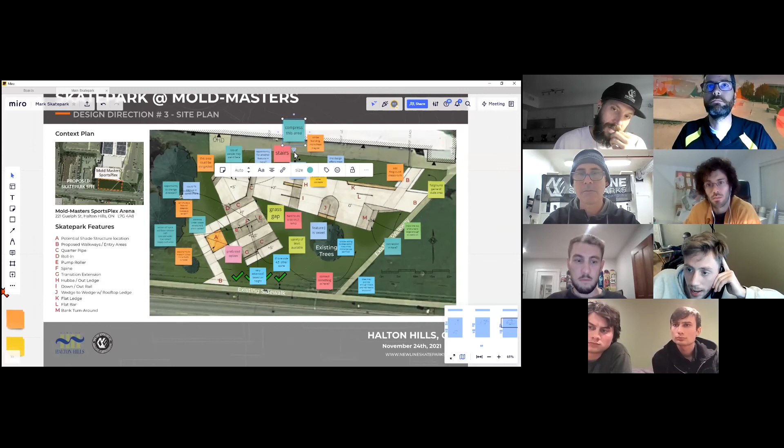Yeah, so you'd be looking at roughly a 4 set or a 5 set, depending on how you detail the stairs there. So it'd be a nice set of stairs.

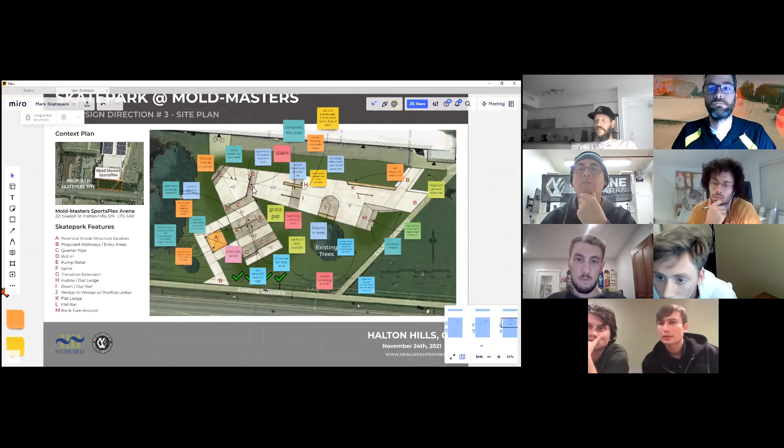And before we had mentioned between D and C up there also, C is really like 11 feet of quarter there. I like the roll in, but you could put instead of a roll in, or just between the roll in and C, you could put a step up or potentially a big stair set there. I think that would be a major upgrade for sure.

Wonderful. Any more comments at all, or okay, we will carry on then.

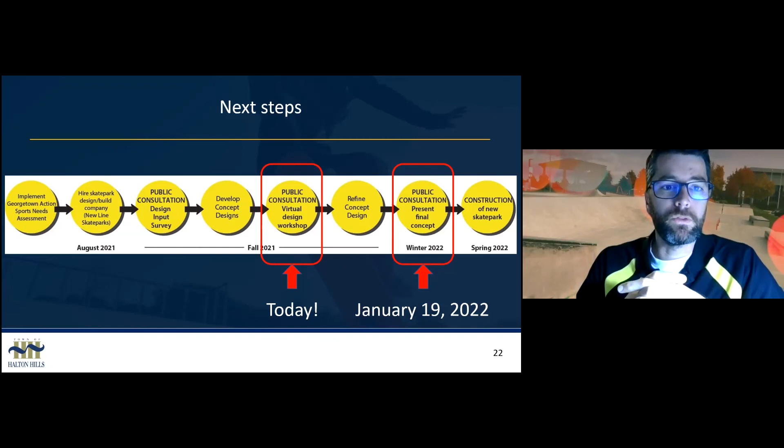That'll put together a final concept. We've already scheduled a date for that meeting, January 19th. We hope you can join us again, and we'll be presenting that final concept and looking for feedback. After the concept is finalized, we'll have another time to gain feedback, say for another week on Let's Talk Halton Hills. Through the winter, that'll get turned into construction drawings, preparing us for construction as soon as the weather permits in the spring. This is a design build contract with New Line, so their crews will be constructing the skate park, and this is their first project of the year for 2022, which will allow us to have it built as soon as possible, with the hope to get skating on it in summer of next year.

So that concludes our workshop. I'd certainly like to thank you very, very much for your attention and continued participation in this project. Please feel free to contact us or visit the project homepage to stay up to date with information. Thank you very, very much.